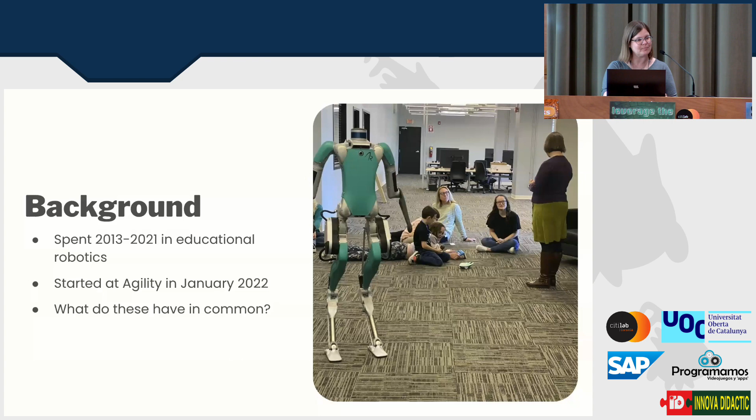So today I want to talk a little bit about big fancy robots and how we can expand who can program and work with them. I'm going to talk about a few ways that are related to programming, but not exactly the same thing. I really want to focus on what we can do to make it easy to use them.

So I'm going to use a variety of case studies. I have some kids, an artist, the office manager of the Pittsburgh office, whoever I could round up to be my victim as I was experimenting with doing this.

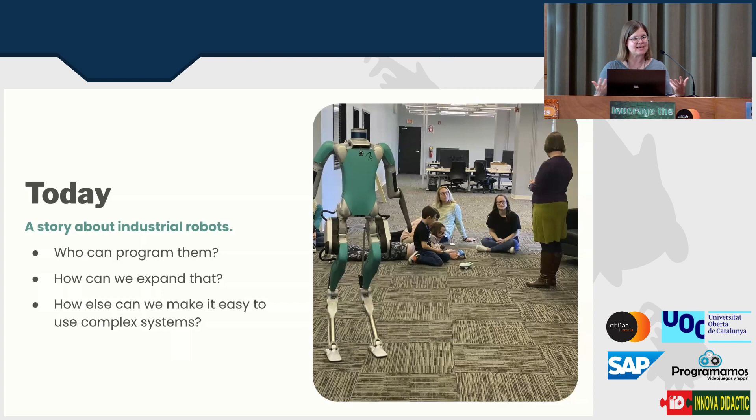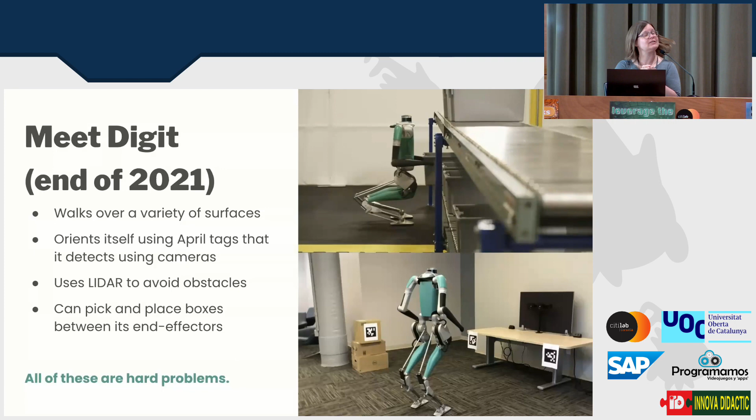So that we all know what it is that I'm talking about: I joined Agility in January of 2022. So basically, this is the robot that greeted me when I arrived. What this robot does, it is designed to do work in warehouses.

So to pick up totes, I actually do not need that sound, so we'll just get rid of, oh, that. I'm going to assume that's not my sound. Just to be clear, that is not the background music for this YouTube video.

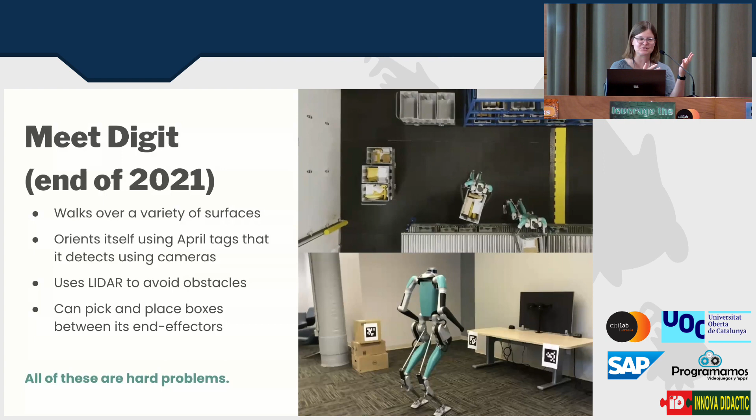So it is designed to do warehouse logistics tasks, basically what you're seeing it do, the boring work of moving totes from one place to another so that humans don't have to. Moving it from those blue shelves, called flow racks because the totes kind of fall down them, over to the conveyor, or from one conveyor to the other.

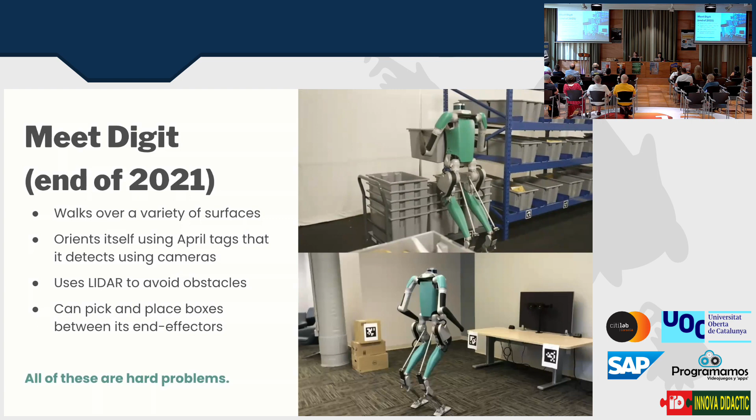That kind of boring, repetitive task is really hard to fill right now because nobody really wants to do it, and I don't blame them. I don't walk into a middle school classroom and ask who wants to move totes for 8 hours a day and get volunteers. There are none. And of course it's very hard on the human body. I'm sure many of us know relatives who've done that or similar work, and it's not easy to do for a long period of time.

So how Digit is doing this, you'll have no doubt noticed it's a walking robot, it does not have wheels. As Jens was asking me earlier, it does walk over a variety of surfaces - flat ground, gravel, a couple of steps, a ramp. If you throw random 2x4s on the floor it can handle that too, but I wouldn't recommend doing that in your warehouse - it's not good practice for your humans. But all of those are fine.

And it is orienting itself using those black and white tags you can see in the picture at the bottom. Those are called April tags. They're used by a number of other people - that's just the name for those patterns. Each pattern corresponds to a number, and Digit looks for those in the environment and has an internal map of where they appear.

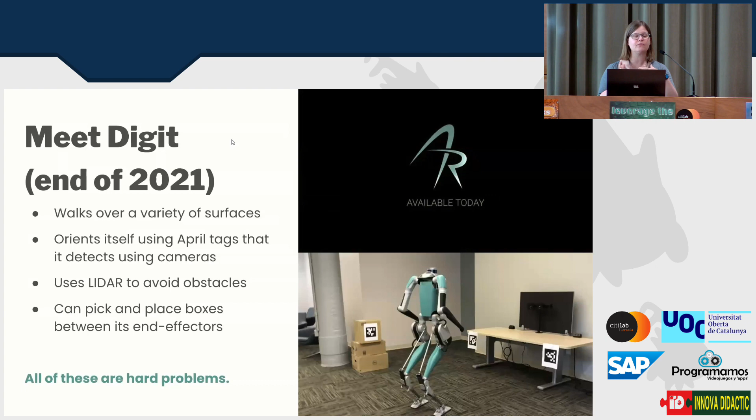It, as you've no doubt noticed, does not have a head in this version. That kind of blue thing on top of its shoulders is LiDAR, so it's using lasers to avoid obstacles. There was probably a picture somewhere showing what the robot's view of its environment looks like, where it's using the LiDAR to see where there are obstacles it should avoid.

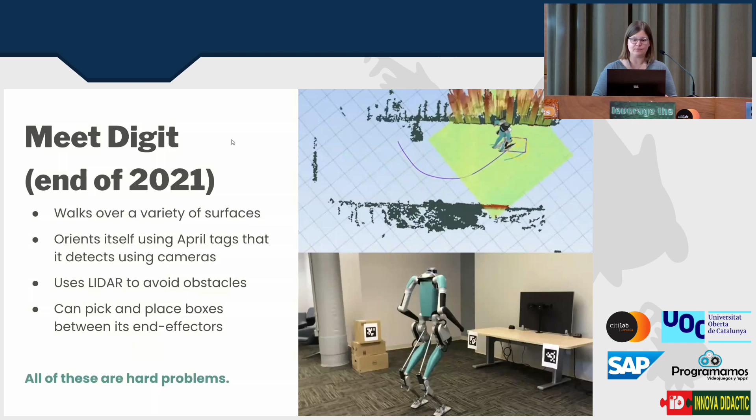And so it's very simply grasping things between what we call end effectors - or you can call them fists - between the endpoints of its arms, and moving them. Now all of those problems in and of themselves are really hard, particularly walking on a variety of surfaces, but really all of them - there's nothing on that list that's super easy.

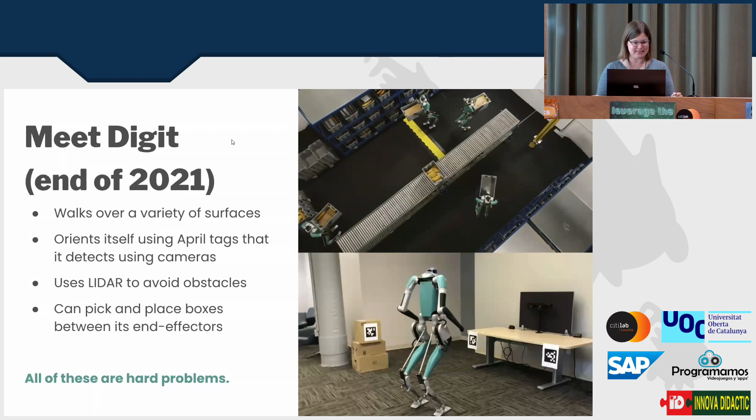So at the end of 2021 and coming into 2022, this is basically what the company looked like sometime in the fall of 2021. I think a few people are missing, and I don't know where they are because I've never seen our floor that clean - I can only assume they had just moved into the office. But the only people programming the robot at this point, and not even most of the people in this picture, were engineers largely with master's or PhD degrees.

They were all working in Python C. They were all extremely good at coordinate transformations, for reasons you'll understand in a few moments. They've read a lengthy user manual, but even after reading it - I started my first week, I dutifully read the user manual, started it up, and I could not do anything. Turns out there were a lot of things not in the user manual that were largely delivered via word of mouth. Martin was one of the people in the back row sitting next to me who answered a lot of my questions about how you really program this robot, because there were a lot of visual cues that weren't in the user manual.

So we were growing very quickly. In January of 2022, we were roughly employee 60-something. As of this week, we're probably roughly 225, 230. So we had a serious 'how do we onboard people' problem. Our first training problem was not training people outside our company - it was training people inside our company.

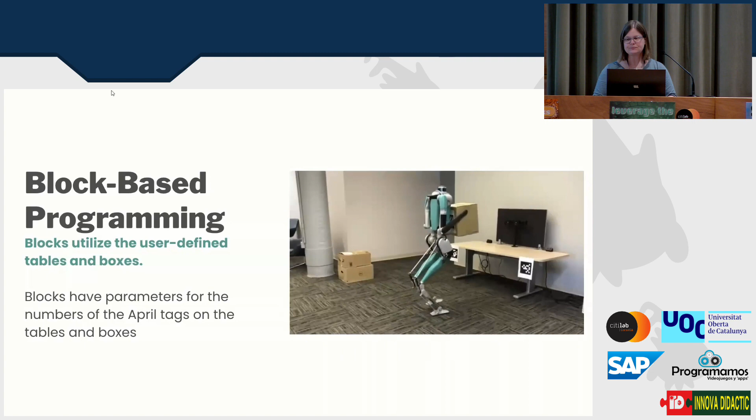Now the blocks have parameters for the April tags, so if you add new tables that are the same size with different April tags, that's fine. You can use the same table type. You don't have to reconfigure all of that in the stage. Similarly, if you have a bunch of different boxes, you only need to define table types and box types, and then you just tell it the April tag number. So I was using this for a few things.

This is the corner of our office before we'd really moved into the lab downstairs. I was running Digit around up there. Before the SNAP conference last year, I tested this with my delightful and long-suffering office manager, Brianna, who is always up for helping out with whatever weird experiment I've decided we're running that day.

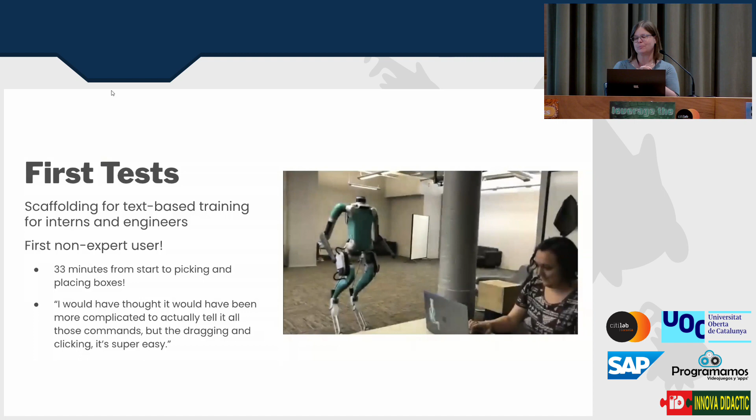So she is testing this out, and it took her about 33 minutes from the start of me explaining what was going to happen to her picking up boxes. This is about 2 months after it took Curran and Jack basically 3 days in Python to reach that point.

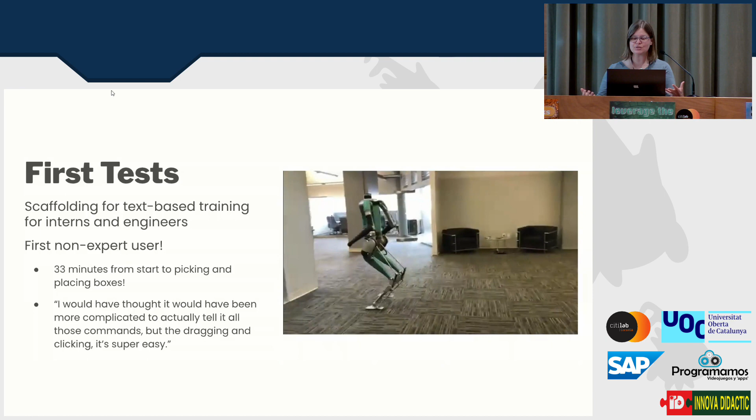And she was really kind of excited. I mean, she'd seen the rest of us wandering around picking up boxes with these April tags, so she was interested to know what it was that the rest of us were doing all the time.

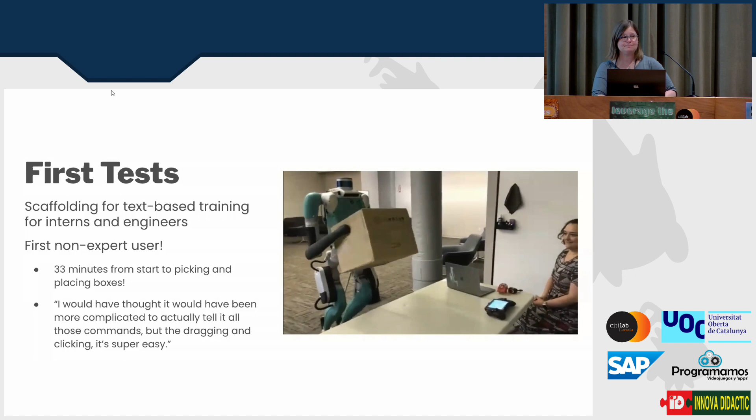And I will say she is very talented at coordinate frames, Brianna. I was quite surprised when she told me she hadn't had a math class in a while, because she did get that part quite quickly. She really found it pretty straightforward.

It walked her through the steps. She was able to get up and running and move the box. And so I was using this as well.

Most engineers, and I'm still training engineers, do need to do it in Python, but I found it really helpful for them to go through this process, particularly our interns, because the chunks of the program are the same in Python. You still need to set up your environment, you still need to look for the box, tell the program what you're looking for before you try to go to any positions or pick and place boxes. So I went through that as I was training people to give them a general idea before we got caught up in the minutia of what all that Python syntax had to look like.

So actually, while I was out in Oregon that time training Jack and Curran, I noticed this woman randomly painting on the wall over in the facility. This is Agnieszka Pilat. She does not work at Agility. She is an artist who has worked, whose specialty is kind of art about technology. She has worked with Spot from Boston Dynamics. I think she's currently doing a show in Australia of that work.

And she had approached Agility. We don't pay her, and in fact she does not pay us. She pays her own lodging and travel. She had asked to come to the facility and paint Digit. There was also an augmented reality thing going on with that piece there. I thought that looked pretty interesting, so I just went over to figure out what she was doing.